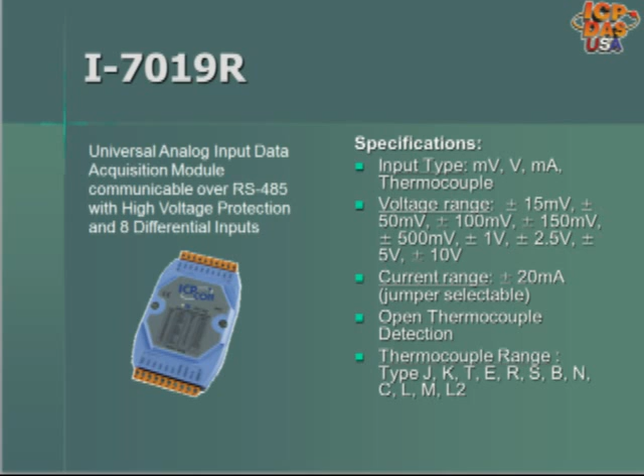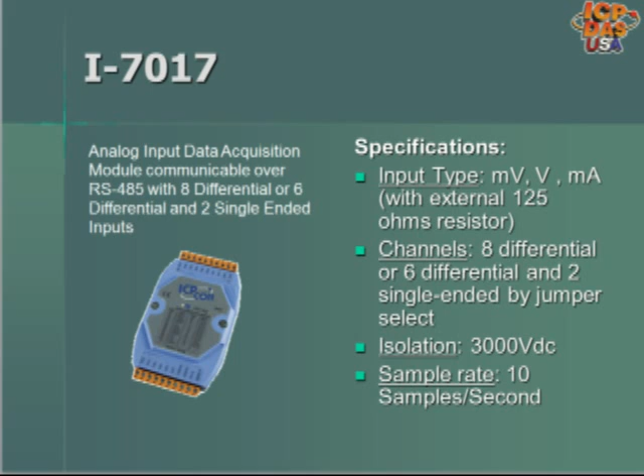I-7017 is an analog input module that can measure voltage or current. If you want to measure current, you can open up the module and insert a 125 ohm resistor inside and close the module back up. It has 8 input channels.

I-7017 is being used in the energy industry with solar panels, wind turbines, and inverters. The solar panels and wind turbines produce DC direct current energy. The inverters convert the DC direct current energy into AC alternating current that can be fed into a commercial electrical grid. DN843I is a current input sensor board that can put out voltage. I-7017 can take that voltage so it can be brought back to a computer for data logging, control, and monitoring.

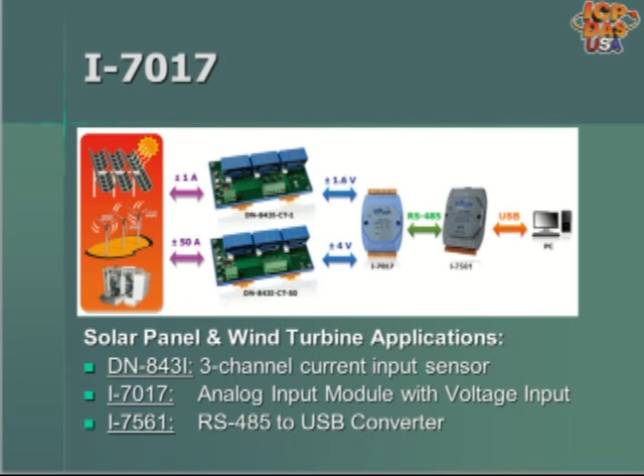I-7561 converts the RS485 signal, which I-7017 communicates over, into USB, which most computers support. NASA is using I-7019R and I-7018 data acquisition modules for measuring temperatures and strain in their heat treatment facility and creep testing lab. The modules are daisy-chained together over the RS485 bus. Strain and thermocouple sensors are connected to the terminal blocks of the I-7019R and I-7018 modules.

DCON Utility is a software tool we provide for use with our RS485-based data acquisition modules like the I-7000 series. It can be used for configuring the input and output types, addresses, and baud rates for the modules. The M-7000 series is just like the I-7000 series, but it can also communicate over commonly used Modbus RTU protocol. They, like the I-7000 series, are small and can fit in the palm of your hand. They can also be daisy-chained over the RS485 bus.

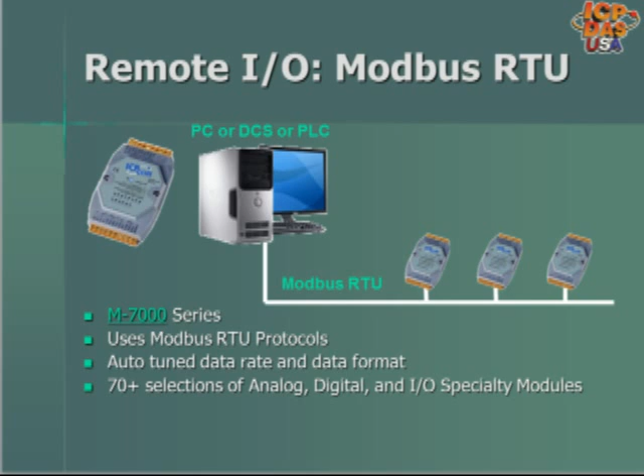Many other vendors have devices that communicate over Modbus RTU. Our M-7000 series can be used with other vendors' PLCs that support remote Modbus RTU-based I/O modules. They, like the I-7000 series, are configurable with DCON Utility and can be mounted on a DIN rail. We came out with the smaller TM series that are similar to the M-7000 series and support both Modbus RTU and DCON protocols. They are about half as big as the I and M-7000 series products. They are configurable with DCON Utility.

Zigbee wireless I/O modules are like the M-7000 series, except they need a host converter to be able to communicate back to a PC or controller. They support DCON and Modbus RTU protocols. They are set up with some dip switches on the side of the product so they can be in the same wireless network and have a unique address. They are used for applications like building, factory, and machine automation.

At the bottom right of the image, you can see a host converter connected to a PC. Each Zigbee network needs a host converter to act as the coordinator for the network. It helps to establish the communication path between the computer and the end devices. The PC holds a control and monitoring program, so operators can see the status of the factory, and they can also turn things on or off as necessary through the program. To the left of the host converter, you can see a Zigbee I/O module, which can be used to turn things on or off based on conditions.

At the top right of the picture, you can see a Zigbee slave converter is attached to a touchscreen HMI, human-machine interface. With it, users can input things like the number of pieces of material a worker cut with an industrial saw. The image also shows other I/O modules and devices connected to the wireless Zigbee network for providing information for control and monitoring.

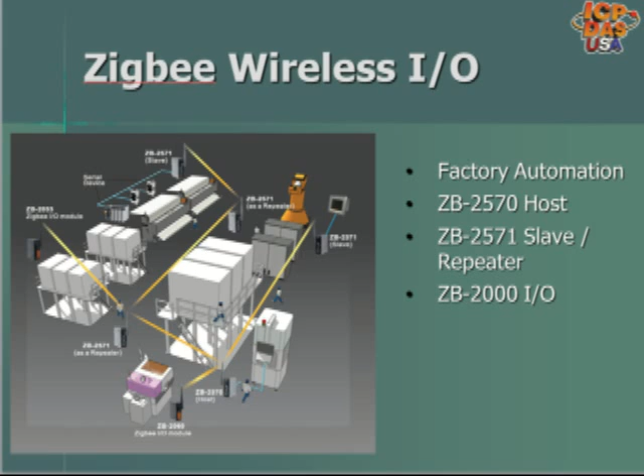Like the I-7000 and M-7000 series, we have a similar ET-7000 series that supports Modbus TCP protocols and communicates over Ethernet cables. You can use industrial Ethernet switches like NS205 or other Ethernet switches with them. They have a web server inside for configuration. They have an IP address, and you can also upload images to them to show inside of the web server.

For example, if you were monitoring tanks, you could have a page that shows a graphic of a tank above the data, so it's clear to the viewer what kind of data is showing. You can also make different labels in the user interface to show what kind of data is being acquired, like fan, light, pump, motor, and things like that, right next to the input data. You can use a standard web browser and the module's IP address to pull up the web server for configuration and monitoring. ET7017 has 8 analog input channels and 4 digital output channels.

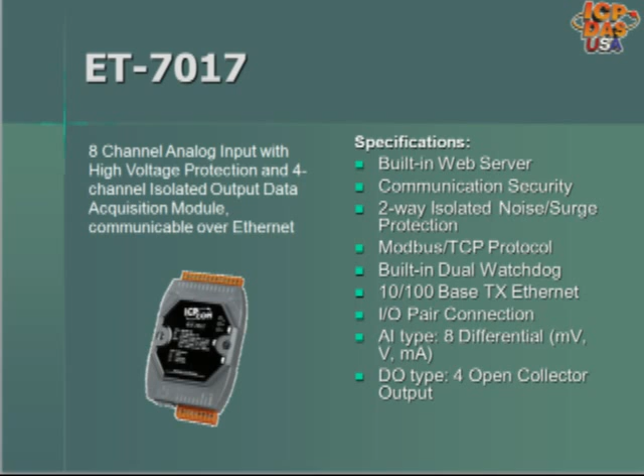It has a built-in dual watchdog, so it will reset itself if there are any hardware problems or software problems, like if the module isn't communicating or if it locks up. It supports I/O pair connection, so the input on one can trigger the output on another. To set them up, you can connect them directly to a PC, or you can connect them to a switch or hub to get them on the same network.

Mini OS 7 Utility is a software tool we provide that allows you to search and find our Ethernet products on the network. You can use it to set the IP addresses of our Ethernet controllers and data acquisition equipment. To access the web server, you can open a standard web browser and enter in the configured IP address. You also need to enter the username and password.

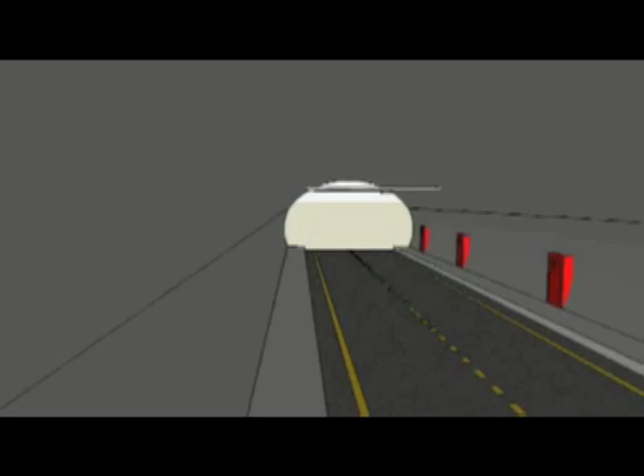In the emergency warning system of a tunnel, we need to control the cameras and to receive signals from smoke sensors and transmitters. But how can we build such a long distance and immediate transmission control system? Offered by ICP DAS, ET7000 modules can be linked to devices like cameras, smoke sensors, and transmitters. ET7000 modules can send their signals to the Internet, which provides immediate and long-distance transmission. ET7000 modules can also send digital output signals to remote devices.

Other devices can also receive data from the web. For example, web-based LED displays can display the warnings to keep the roadway smooth and safe.

The PET7000 series can communicate over Ethernet and Modbus TCP like the ET7000 series. It can also be powered by a Power over Ethernet switch. Power and data can be sent over a standard Ethernet cable. Modbus TCP-based data acquisition equipment can be interfaced with through a web browser or with software tools like SCADA software that supports Modbus TCP protocol.

Our remote I/O modules are being used for monitoring temperatures on wind turbine blades to help measure performance. Our ET7018Z, M7018, and I-7018 can be used to monitor temperature since they have thermocouple inputs. We also have TET and TPET Tiny Ethernet and Tiny Power over Ethernet modules that are similar to the ET and PET modules but are smaller in size. They support Modbus TCP protocol.

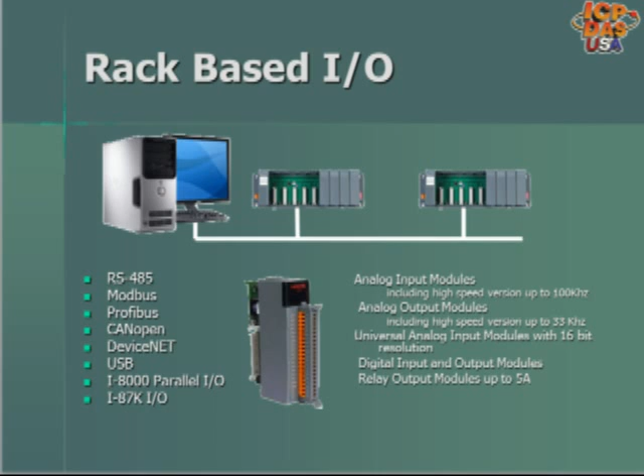We also have rack-based data acquisition equipment that uses cartridges that go in racks that communicate over different protocols like RS485, Modbus RTU, Modbus TCP, PROFIBUS, CANopen, DeviceNet, USB, and more. We provide a wide range of cartridge-based I/O modules. Rack-based solutions can offer a large number of I/O in a small space.

PROFIBUS is the Process Field Bus Protocol, an open digital communication system that is widely used in factory and process automation. It is suitable for fast, time-critical applications and complex communication. We provide remote and rack-based PROFIBUS data acquisition hardware that can communicate with PC or PLC DP masters. PROFIBUS products are widely used in applications like building automation, process control, environmental control and monitoring, and factory automation.

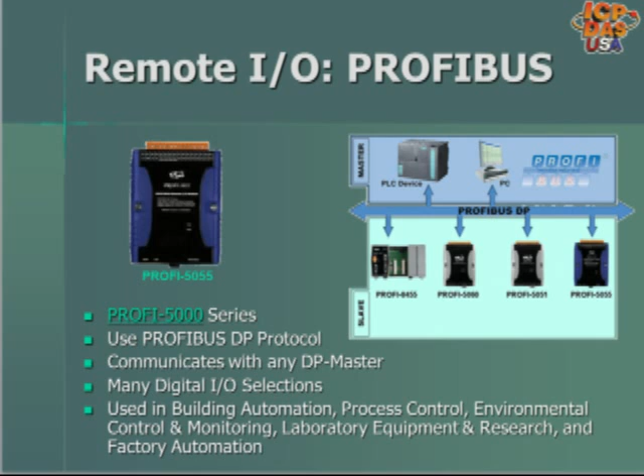CAN bus is the Controller Area Network and is a protocol that was designed for automotive applications. It is also used in aerospace, industrial automation, and medical equipment. It allows microcontrollers and devices to communicate with each other. A PC could have a CAN communication board inside and could communicate with a CAN I/O device over the network. The CAN I/O modules could be connected to various sensors for reading things like pressure and can also be used to interface with lights or other inputs and outputs in a vehicle system.

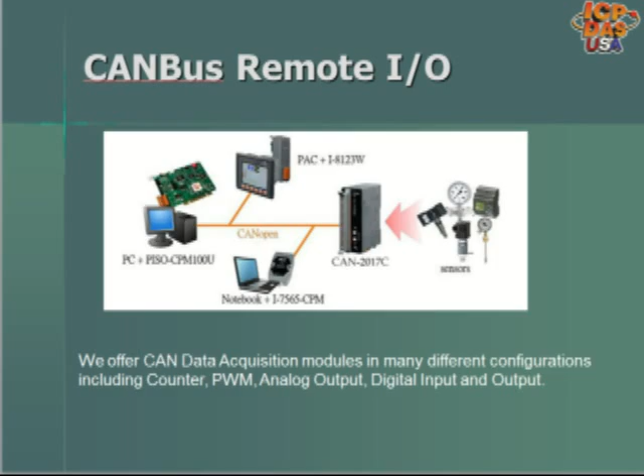DeviceNet is a protocol that is layered on top of CAN technology and is used in the automation industry for connecting control devices and exchanging data. It is more robust when compared to RS485-based protocols. We provide DeviceNet I/O modules for incorporation into DeviceNet networks.

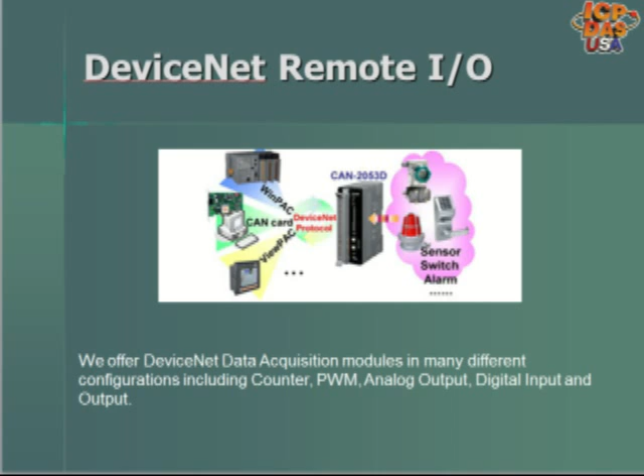FRnet is a field bus developed by ICP DAS. It features high-speed and long-distance data transmission and is designed for digital I/O control. Most importantly, only 2 wires are needed to transmit data, making FRnet itself in the field simple and beautiful. Now ICP DAS has more than 20 kinds of modules supporting FRnet. Let's check out more of its unique features and actual applications in building automation.

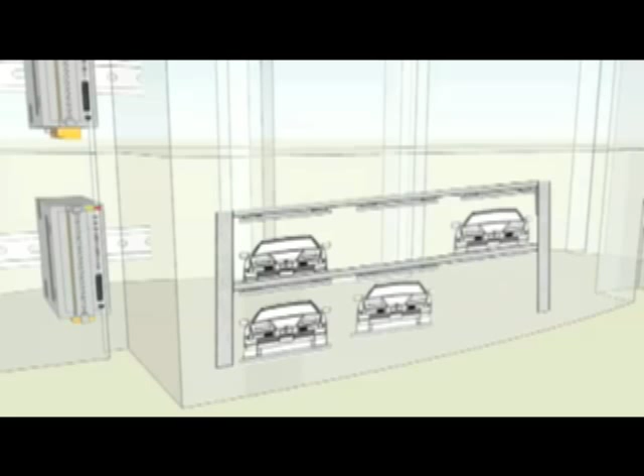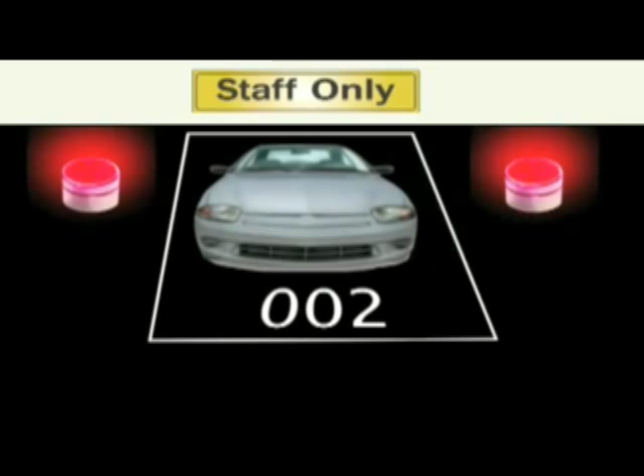On the first floor, ICP DAS FRnet modules play an important role in the cubic parking system. They help to ensure cars are parked precisely in the correct positions. Once a car is parked out of the edge, a sensor will be activated. An alarm will be sent to the driver until the car moves into the correct position. Let's go to the second floor.

On the second floor, a smoking room on the right-hand side features independent air conditioning. A smoke detector in the corner sends signals to the FRnet module when it detects smoke. The fan is turned on as soon as the FRnet module receives the signal from the smoke detector.

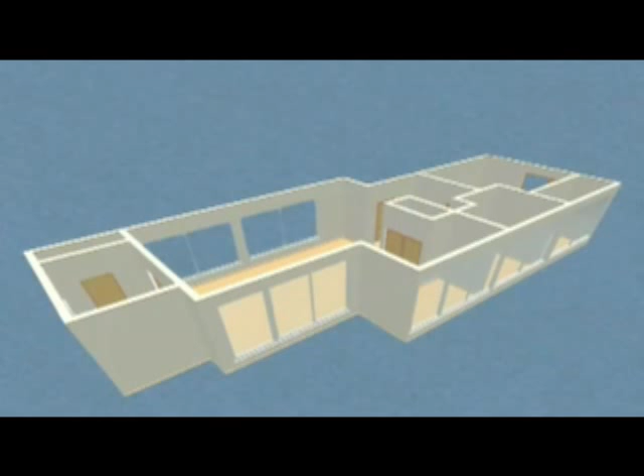On the third floor, the FRnet module controls the on-off function of the lights in the meeting room. With instant response time, the FRnet module has excellent performance in the digital control application. On the top floor, the status of windows and doors are monitored by the FRnet module. When any window or door is opened, the FRnet module will instantly detect it and send its status to the control center in real time.

Through the nature of FRnet, data is sent through 2 wires. Imagine that! Throughout the whole building, from the first FRnet module to the last, only 2 wires are needed. FRnet makes installation simple and neat.

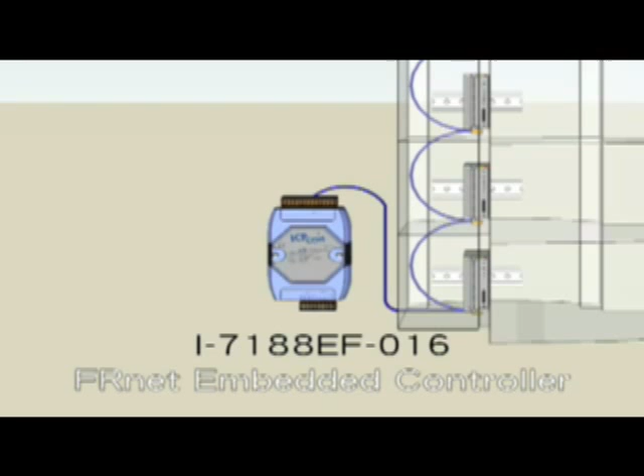Shown on the left here, I-7188EF-016 is an embedded controller with FRnet ports. It receives data from FRnet modules and sends data to the control center through Ethernet communication. We can see detailed information coming from all of the FRnet modules in the building on remote computers.

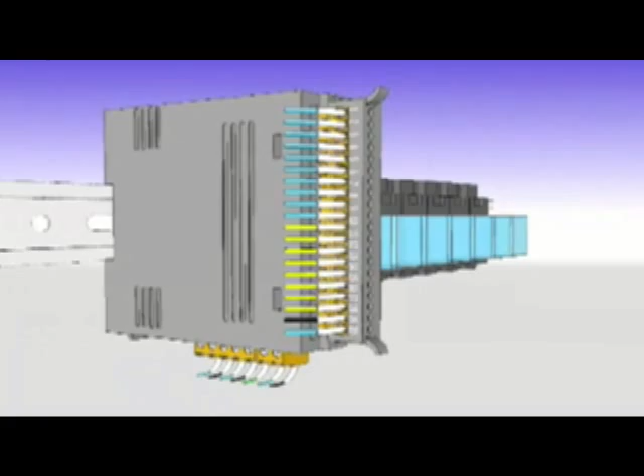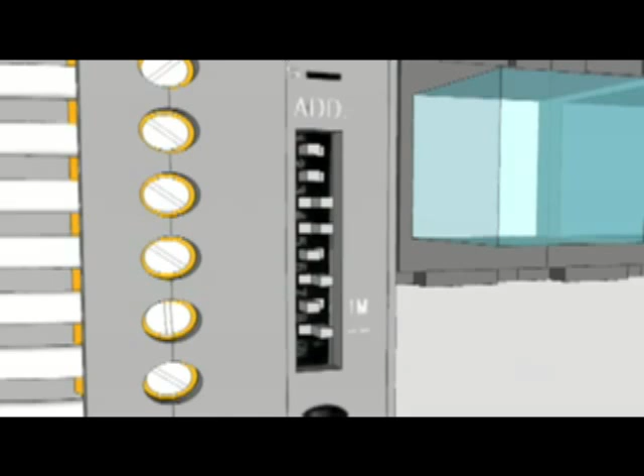Replacing FRnet modules is as easy as playing with Legos. Replacement has 4 steps. First, unmount the broken one. Then, mount a new one. Then connect the terminal blocks with the new module. Then set the dip switch on its panel. Believe me, everything is done and the new FRnet module is working now.

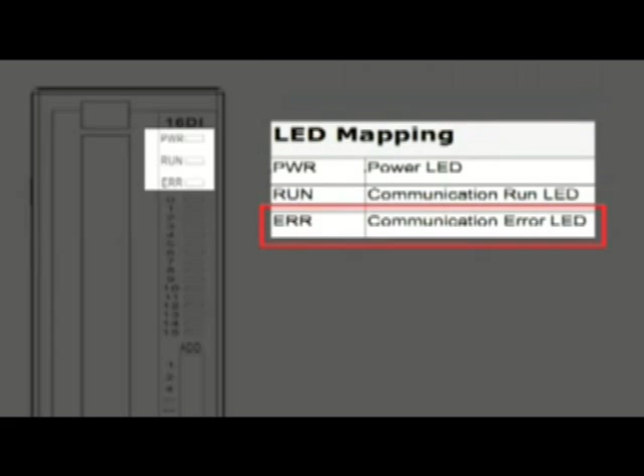Thanks to ICP DAS engineers, many user-friendly designs have been added to FRnet modules panels. There are 3 LEDs at the top of the panel. The last one, Error, indicates incorrect wiring or bad communication in the field. This design helps users to locate problems easily on the spot.

At the bottom of the panel, there's a dip switch for configuration. No computer or laptop is needed. Just by moving your fingers, the FRnet module is ready to work.

The embedded controller I-7188EF-016 has 2 FRnet ports to handle data from FRnet modules. Up to 16 FRnet modules can be connected with I-7188EF-016 simultaneously. Users can also write their own programs for I-7188EF-016 to control the FRnet modules.

USB-based remote I/O is convenient for small data acquisition applications using the USB port on a computer. You can use many of them in one application with a USB hub, like our USB 2560. You can make PC-based applications for them using Visual Basic, C++, or other Visual Studio.NET based applications. We provide libraries for program development.

We also provide PC-based data acquisition boards that can fit in the PCI slot in a computer. We also provide older ISA boards, for older computers. Since the PC board is installed inside the computer, you need to run a cable from the PC board to the interface or daughter boards, which are used for wiring to different sensors and equipment.

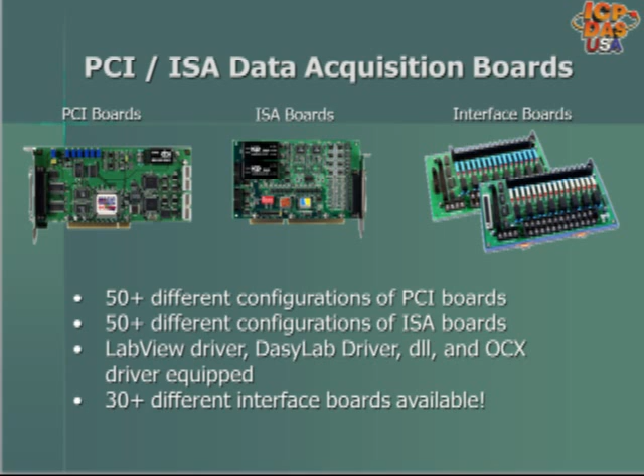Energy management systems help with monitoring power consumption and energy usage. Monitoring energy can help you save on costs, since changes can be made to reduce energy usage when it's not needed. SCADA control and monitoring software can be used to display the data in a way that's easy to understand and analyze. Power meters can be used to gather kilowatt hours and energy consumption data.

Power meter concentrators can be used for logging and displaying power meter information. Data logger devices like power meter concentrators allow information to get logged on a micro SD card in a CSV, comma-separated value, format that can be opened in Microsoft Excel.

Easy Data Logger is a free software designed for ICP DAS users to easily and instantly build a SCADA system. With Easy Data Logger, we will show you how simple it is to quickly establish the SCADA environment. Before everything starts, we must do some preparation. First, we need a 24-volt power supply and two ET7000 modules.

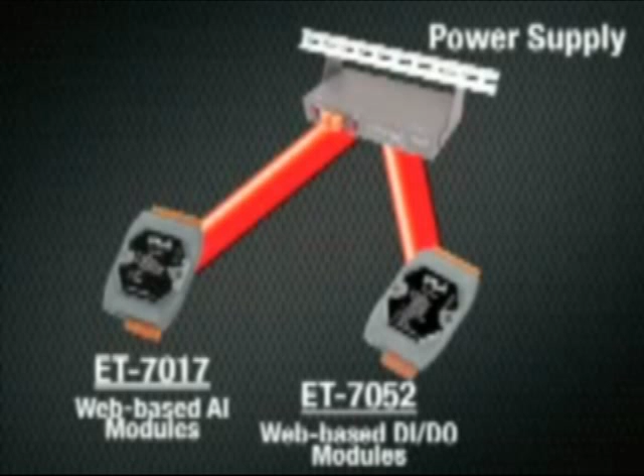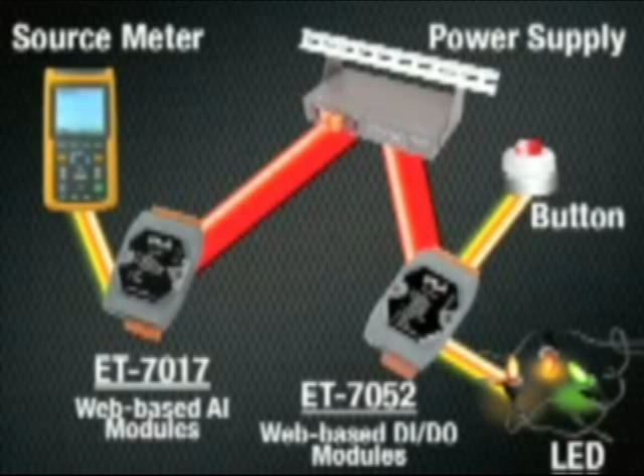On your left side, ET7017 is a web-based I/O module with analog input channels. On your right side, ET7052 is a web-based I/O module with digital input and output channels. We also need to link a source meter to ET7017 for analog input, and a button and LED lights to ET7052 for digital input and digital output signals. Just link all the devices together and it will be like this.

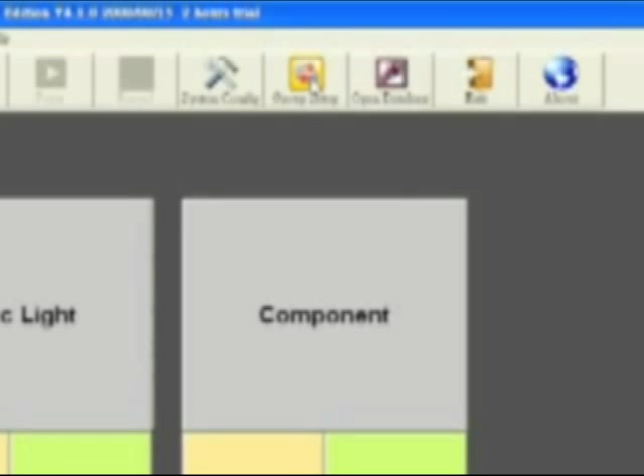Now we can start to run Easy Data Logger. Run the application and you'll see the built-in groups Traffic Light and Component on the left side. We're going to build a new group. Click Group Setup and then we can see the group setting window. Now we can see 3 steps here. By following the steps, we'll finish establishing this SCADA system.

Let's start the first step. Click Install. The driver window will pop up. Here we have to set the communication mode between the modules and the PC. Since ET7000 modules communicate with the PC by TCP protocol, we choose Modbus TCP. Next, we have to enter the IP address of the module. You'll find the IP addresses in the manuals of ET7000 modules.

In order to recognize the modules conveniently, we set the end of ET7017's IP address at 17. Click Install when the IP is entered. We find the IP of ET7017 we just entered is in the block of Step 1. This represents we have successfully added ET7017's driver.

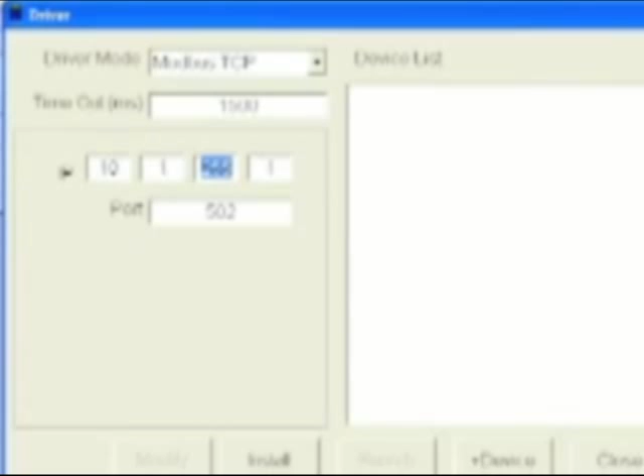Follow the same steps to install the other module, ET7052. Choose Modbus TCP and enter the IP address. We will set the end of ET7052's IP address as 52 for convenient recognition. Here we can see that ET7052's driver has also been successfully added in the driver list.

Now on to the second step. In this step, we're going to add ET7017 and ET7052 into the device list, which means that we're going to activate their channels. Click Add under the device list. The system shows the configuration window. Click the arrow and go to the next page.

Here we can see the IP added for the Modbus TCP devices on your left side. Now we can give them nicknames. Attention! To prevent errors, we shall not use the minus sign in the nickname. We will name the ET-7017 module as ET_7017. Next, we have to set the address range definition.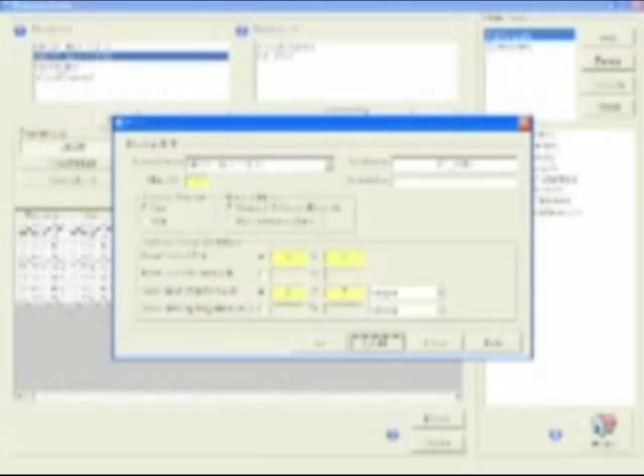Since ET7017 has 8 analog input channels and 4 digital output channels, we set its AI addresses from 0 to 7 and DO addresses from 0 to 3. Click Add, and those channels are now in the AI and DO lists.

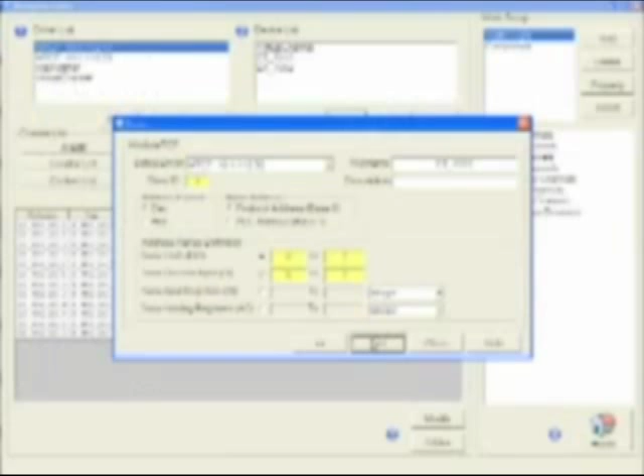Use the same method to activate the channels of ET7052. Name it, set the DO from 0 to 7 and DI from 0 to 7. Click Add, and those channels are now in the DI and DO lists. Let's check if all the channels have been activated.

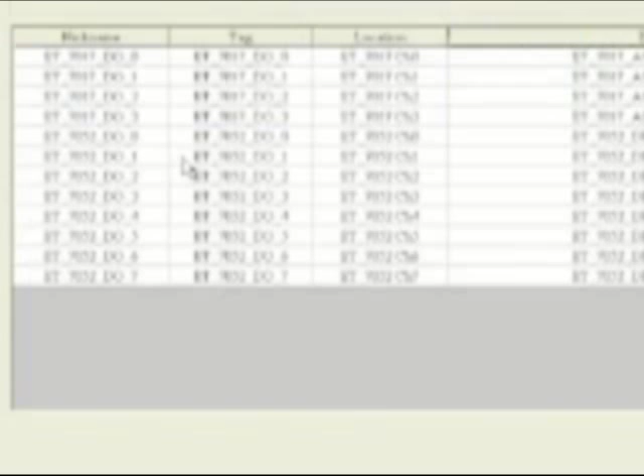Good! Now it's time to build the group for our SCADA system. Click Add in the Work Group column. We will name the group as ET7000.

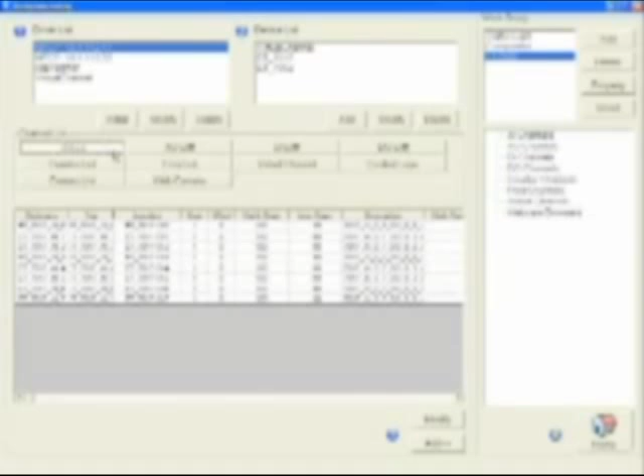Now we are going to do step 3. In this step, we can add the channels into the ET7000 group. Just choose the channels you want to add and click the Add below. For this demonstration, we will add all the channels into the group. You'll see all the added AI channels in this frame. Let's add the rest of the DI and DO channels into this group.

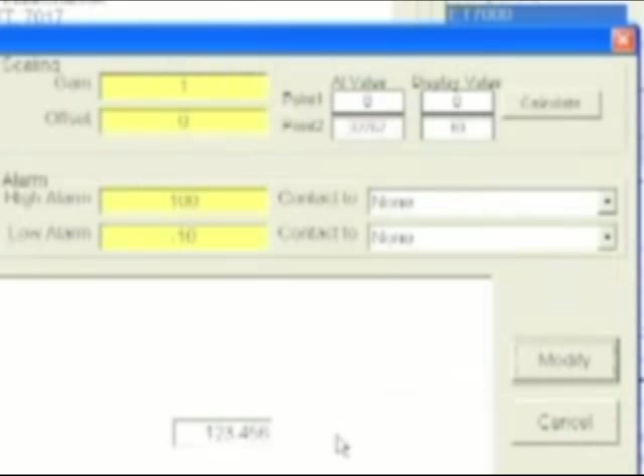ET7017 AI_0 is the channel that links into the scope meter and receives analog input signals from it. We have to configure the analog input parameters before the system is done. Choose ET7017_AI_0 and click Modify. We can see the Modify channel window. Refer to the ET7000 User's Manual and you'll understand how to set it. Click Modify to save the values.

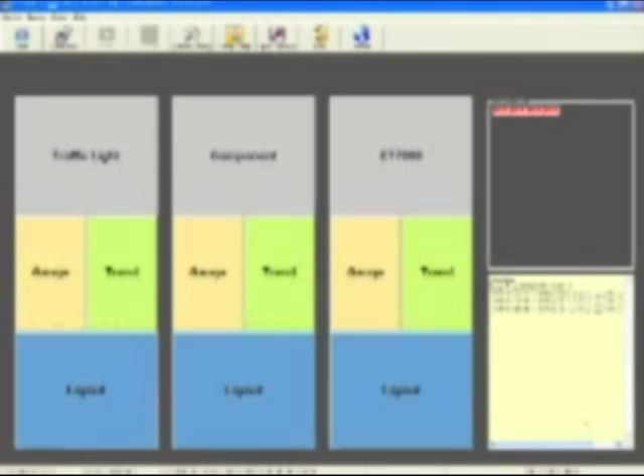All 3 steps are finished. Press the Home button at the bottom right to get back to the main screen. Now we can see the ET7000 group on your right side. We can start running the group by clicking Start. At this moment, the red signs turn into green signs, which represents that the system is running successfully.

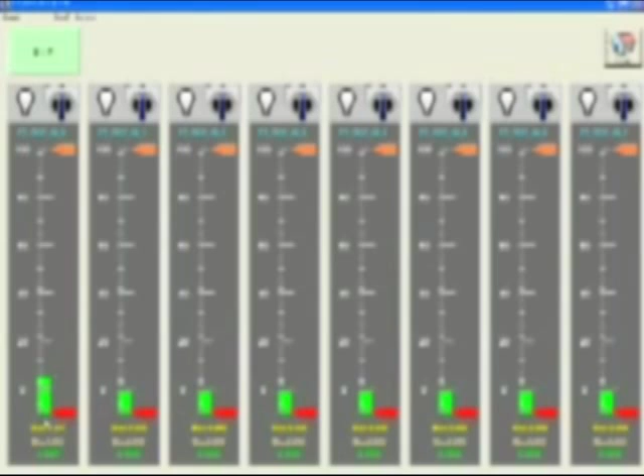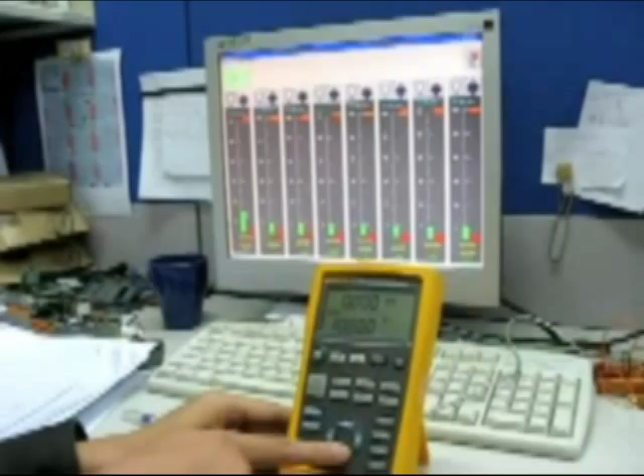Now it's showtime. Let's see what EZ Data Logger's got. Click Gauge in ET7000 group to enter the gauge window. The first one is the gauge for ET_7017. When we change the value from the scope meter, we can see the gauge value changing with the scope meter at the same time. In less than 5 minutes, we set up an analog input data acquisition system.

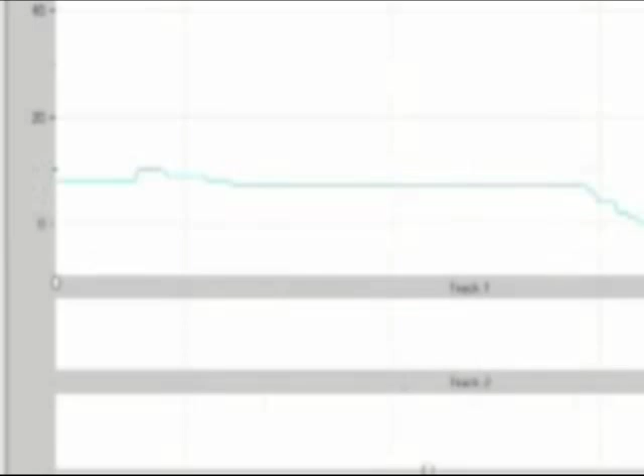Easy Data Logger also provides trend recording, another convenient tool. Click Trend and select ET_7017. The real-time record will show immediately.

Layout is also a great interface for controlling and monitoring digital input and digital output. We can use the cursor to control digital output here. When we click the on-off button on the screen, the LED light, which links to the ET7052's DO channel, turns on and off simultaneously. The digital input will also be shown on the frame promptly. When we switch the button, the layout shows whether the input is on or off.

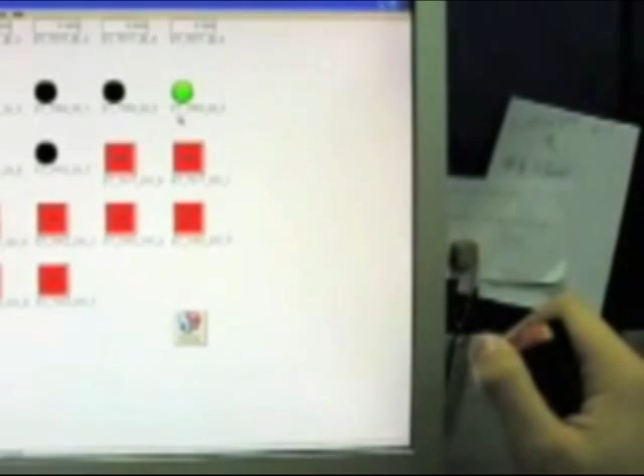Let's go back to the trend. By selecting digital input channels into the monitored variables, their movement will instantly be shown.

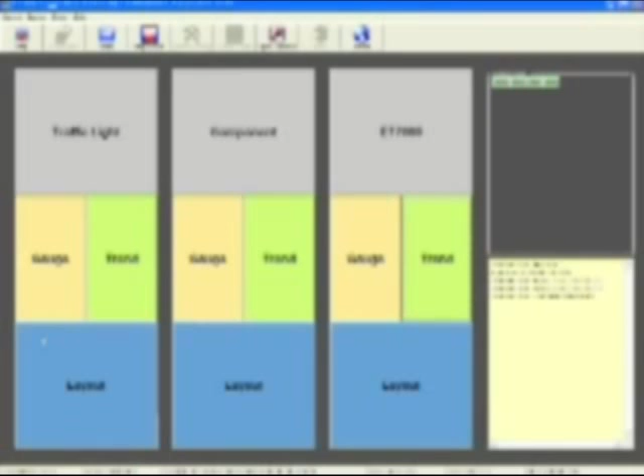Exporting the data is the most important thing Easy Data Logger does. Before that, we have to stop the system. Click Open Database. Choose which database and group you want, and then we can load trends or tables from the database. By clicking the Export button, you can also export the table into Excel files for further analysis.

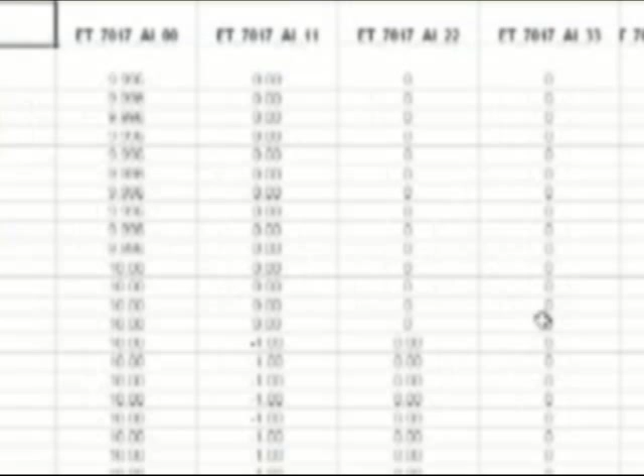Easy Data Logger is a free PC-based control and monitoring software that we provide free with our data acquisition modules. You can use it to send email alarms based on conditions, log data, show information on a screen, or to implement control. You can use it with other vendors' Modbus products as long as you have one ICP DAS Modbus product in the network. It supports up to 64 I/O tags, which are words tied to memory locations in the computer that represent the input and output channels from data acquisition equipment.

You can also display and log from web cameras and can send SMS or email alarms out based on information from the system. You can also set up virtual channels that can hold information, like if you want to take 5 channels and then take the average, you could use a virtual channel to hold the average.

Easy Data Logger supports layout pages, so you can get graphics from the graphics library and map them up to I/O equipment so you can visually see the status of tank levels, pressure readings, or the status of valves, motors, and other equipment. It supports trending, so you can see the status of the equipment in a graph over time.

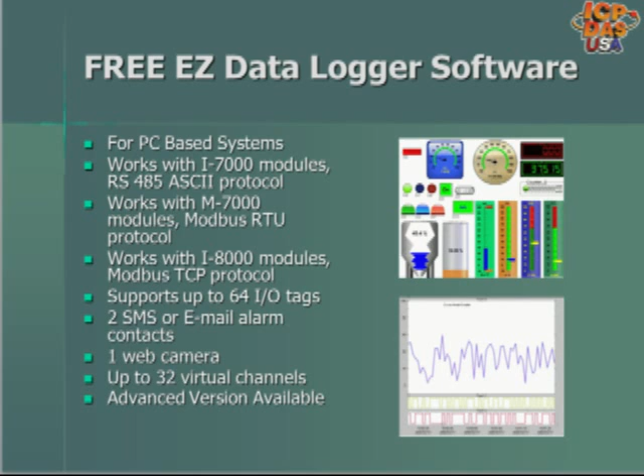The free version supports up to 32 virtual channels, and the advanced version supports up to 256. The free version supports 1 web camera, and the advanced version supports up to 10. The free version supports 2 alarm, SMS, or email alarm contacts, and the advanced version supports up to 10.

The free version supports 64 I/O tags, and the advanced version supports up to 1024. The advanced version costs $629, and you can install it on up to 3 PCs.

SCADA is Supervisory Control and Data Acquisition. SCADA software runs on a PC and allows you to interface with various equipment like data acquisition modules, PACs, programmable automation controllers, PLCs, programmable logic controllers, embedded controllers, and instrumentation devices. It comes with a graphic library that you can use to create a visual user interface that represents real applications.

They also support scripting, so you can implement some control logic through some basic programming commands. They support multi-level user management for security. Different users can have different permission levels.

In this picture here, you can see there are 3 different areas that have a PLC connected to a touch panel and some data acquisition modules. They are connected to a hub or Ethernet switch and a web camera. They are networked back over Ethernet cables to a PC running InduSoft SCADA software. You can monitor and control the system from each area or from the PC running SCADA software.

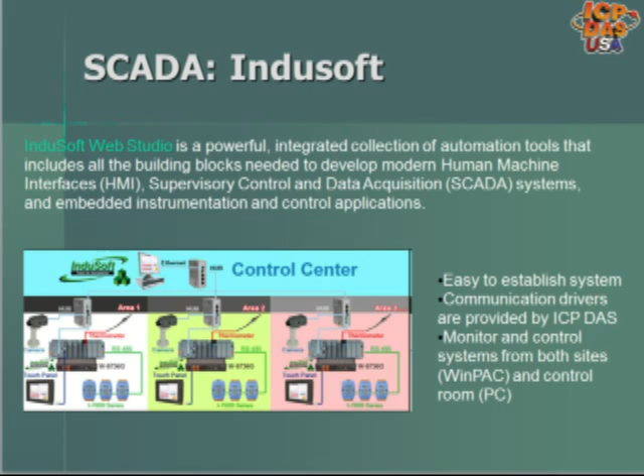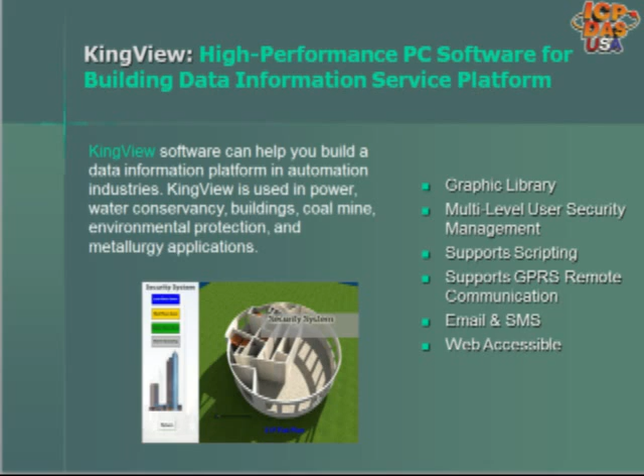KingView is another SCADA package for PC-based automation systems. It is being used for applications like machine control, factory automation, wastewater management systems, building automation, and security systems. It uses static picture files and can support animations. SCADA packages are sold based on tag counts. Tag variables represent actual I/O data that map up to data acquisition equipment, controllers, and instrumentation devices.

The development full package provides a development and runtime license in one USB hard key. When the USB key is left in a PC running the SCADA software, it is licensed and can run. The development packages allow for development of systems, but don't allow you to run them.

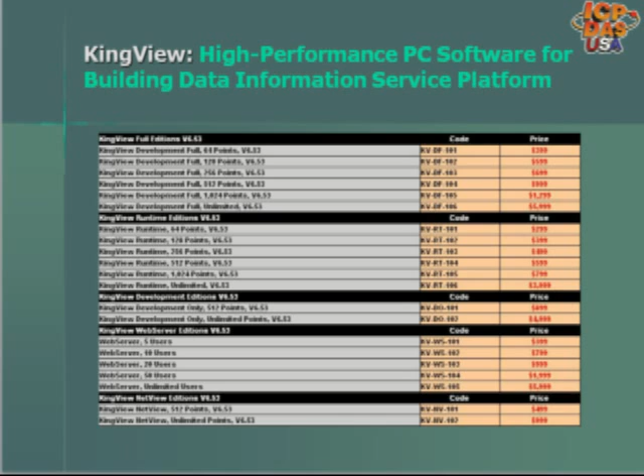Runtime packages allow you to run a SCADA system and don't provide any development options. They are good for developers that want to build a system and then sell it without modification options on board. Unlimited tag versions are available for very large systems. KingView has been used in applications with over 10,000 tags.